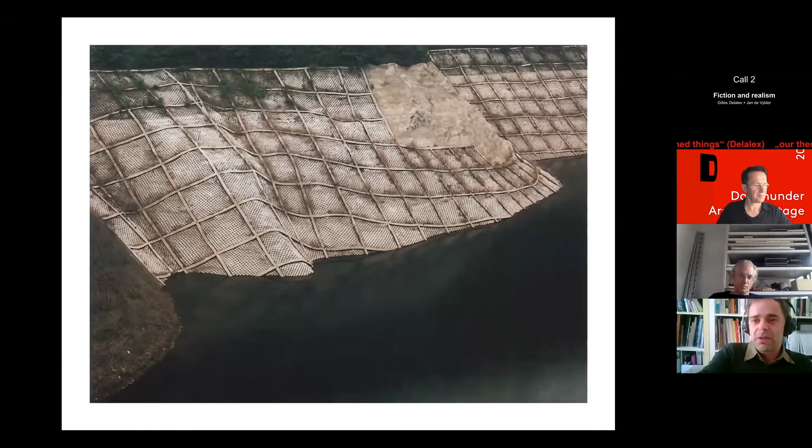We thought that status, it's not exactly architecture, but the status of this construction was quite interesting because they were like adolescents, they were like in the age of transition. You know, adolescents, they don't know whether they want to commit suicide or if they want to grow up, they're in between these two stages of destruction and construction.

So that's pretty much the thread that we try to define, but lately, not so long ago I would say, and that we maybe try to pursue today as much as we can, because it's not always easy to tell a client that their building is going to be like a ruin. It's not easy to sell an idea like that. So there's a series of projects where we've tried to follow a little bit that path.

There was the Saclay building, which is our most known published building, on the campus of Paris-Saclay. The particularity of the building is that you can play basketball on the roof, and half of the space inside is outside.

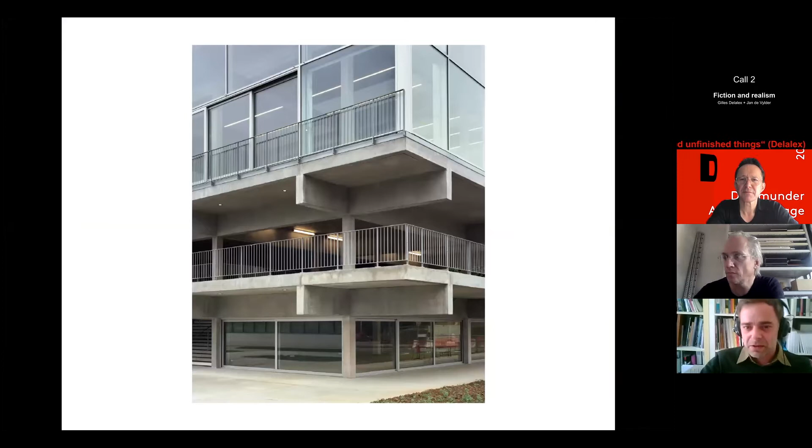Actually, there's only half of the total surface area that is actually built, and that came because the budget was very short. We proposed to not build a few parts, and said maybe on the first story, first level, we'll make it later. We thought it was interesting to have some holes like this in the building, like wasteland, things that are not built yet. And of course it was a powerful gesture in terms of architecture.

And we did a competition a little bit after that, quite in the same vein, because it's a kind of platform architecture where you fit different activities like a shelf, where you can climb from story to story with an open staircase. But this one was for housing and workshops. The idea with that is pretty much the idea of the immeuble villa, and everybody would build its own house inside.

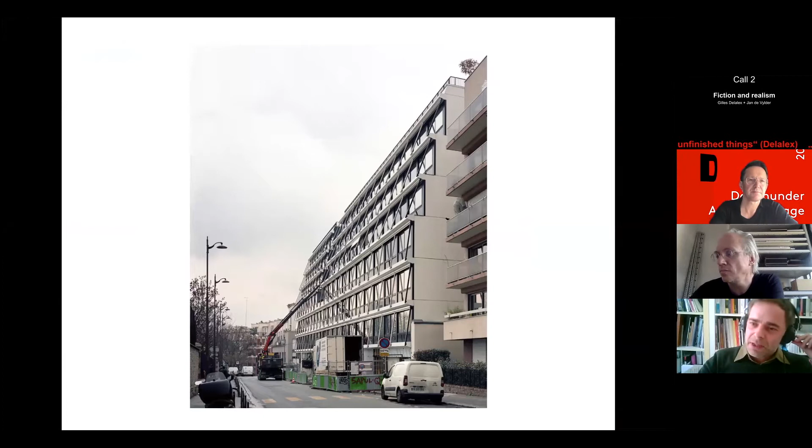That's a little further from the idea. That's a housing building we did in Paris, with Stendhal, in the northeast of Paris, and that was actually our first public commission. It's almost 10 years old. The idea was to work on that layer of balconies facing the street, working on a sort of thick facade that would be appropriable, making the face of the building change over time.

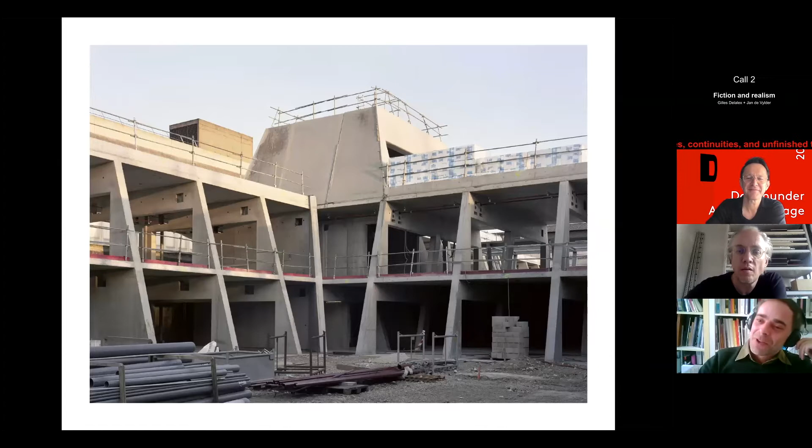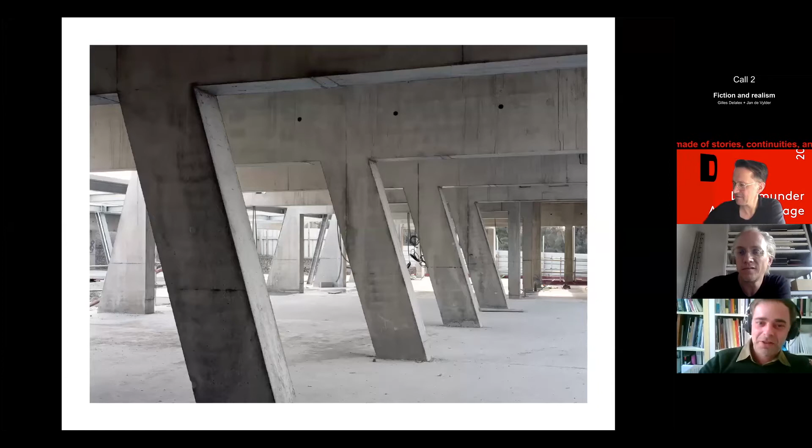And the last building I put is a school we did in the north of Paris, in Clichy. I have to admit we liked the building under construction a lot more than when it was finished. We thought the pictures taken during construction were much stronger, and if we could have kept it like this, it would have been nice. So I'm showing some pictures of when it was being built. The structure, the concrete, was pretty well done according to French standards.

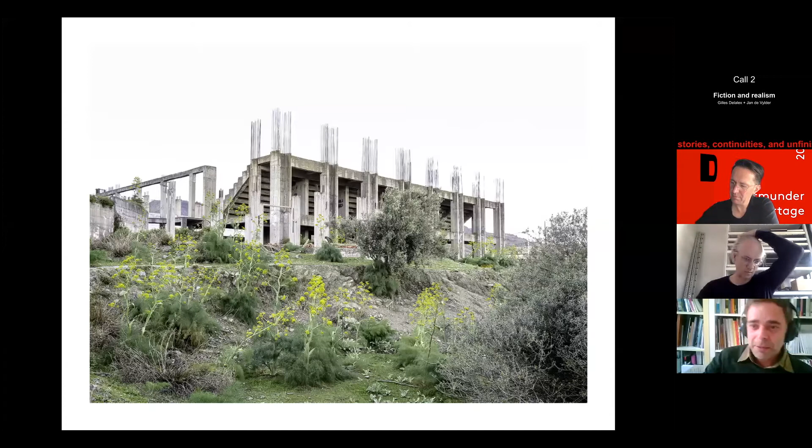And the last pictures I'm putting, which relate to that, are pictures of structures taken by Amélie Labourdette in Sicily and south of Italy. They're beautiful pictures, and I think they illustrate what we mean by this idea we call joyful ruins - ruins that are not in a state of destruction, but frozen, because construction of these buildings was interrupted. It was stopped, and you can feel that a little. They're not falling down, not falling apart. They are growing, but their growth, their construction, is sort of frozen.

So that's pretty much the end of my talk. Really, thanks a lot. Great pictures, and I hope we can keep it in mind for a moment.

I would like to ask Jan to show his short introduction. We are a little bit longer, so take your time, Jan. I think we have enough time to discuss, and it's good to follow your thoughts. Don't feel too much under pressure - even Gilles already spent half the time. No, it's all okay, I just want to prepare.

Okay, here they are. I set them aside because as Gilles was showing these beautiful images, I'd like to show him also some beautiful images he might be very interested in. Where do I start? Do I start with reflecting first on what might be the theme of the afternoon, or do I just constantly start to deny it?

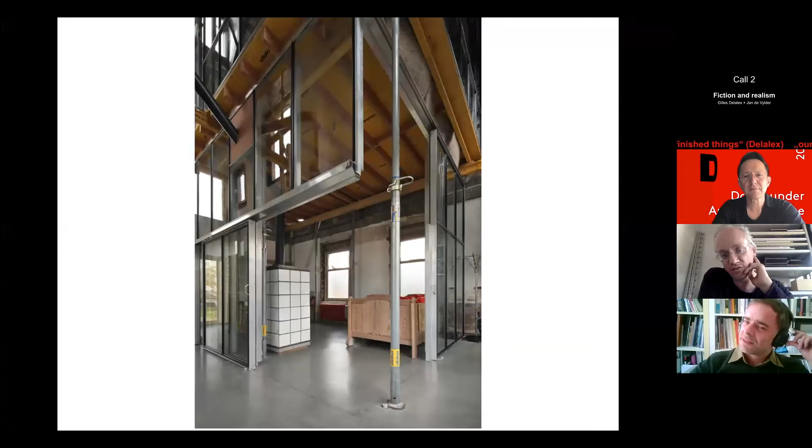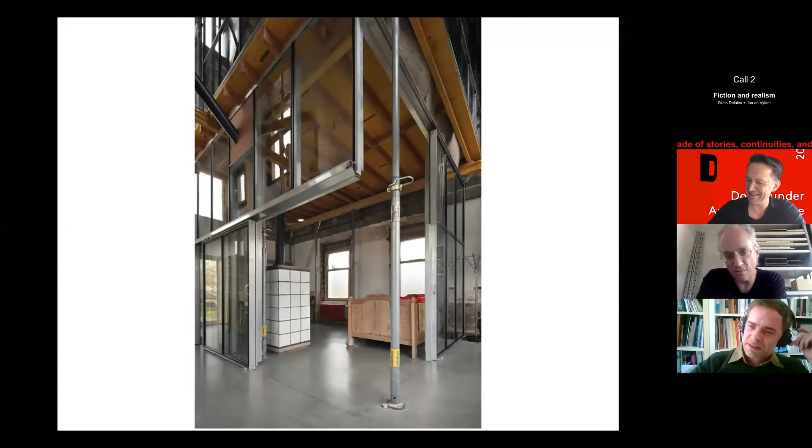And the first project I show you when it comes to an idea of modernity, I don't know, is a glazed house. I tell it like this because of the theme of the afternoon - a glazed house, which is reflecting modernity, isn't it? Into an old house. A little bit the opposite to what modernity might do, getting to the outside, you could say, but here it's on the inside of the house.

And of course, never ever has there been any reflection on modernity when we built this house, never at all. We were building a house to live in, but on the other hand, a lot of things of course resemble or remind or reflect ideas of modernity, like the glazed facade, the productivity of the materials and the systems, of course, refer.

So what you see here is a simple refurbishment of a house. It's more than 10 years ago at this moment, I think, and it's a house that has been made to be self-built. This was one of the premises of the job, because for not 100,000 euros, organizing a house into a building that by renovation only already would cost like 10 times the price.

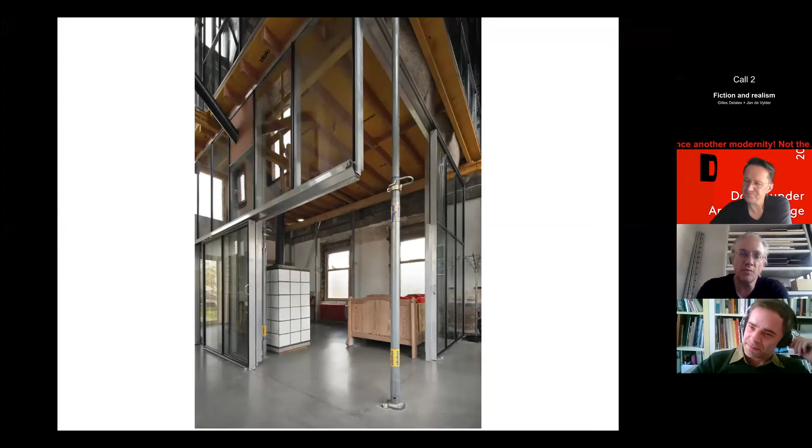Not ten times, I exaggerate, but at least, if you would do it in an ordinary or normal way, you would spend 500 and something like this. So they built themselves a house, an economy based on material economy rather than production economy. That means they could produce it themselves, which of course is valued at zero. Well, valued very much because it's your own human interest, your own human energy, but you don't have to pay for it.

So what you see here is a small house within a smaller house, within a slightly taller house, I would say, in which everything has been constructed so that productive ideas on one hand, but also an artisanal, personal way of realizing, has been important. I think that last point is not at all the idea of modernity, not at all the idea of how to produce space. But this is what it is at this point.

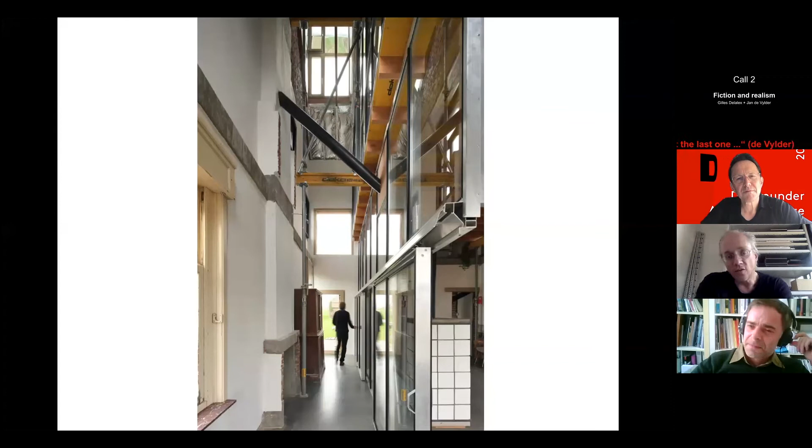And of course it's not only about reflecting on how to make it, how we can possibly do, what can we do, but it's also related to ideas on simple things. We believe architecture is still important to light, shadow, life, air, view, perspective. Look at this.

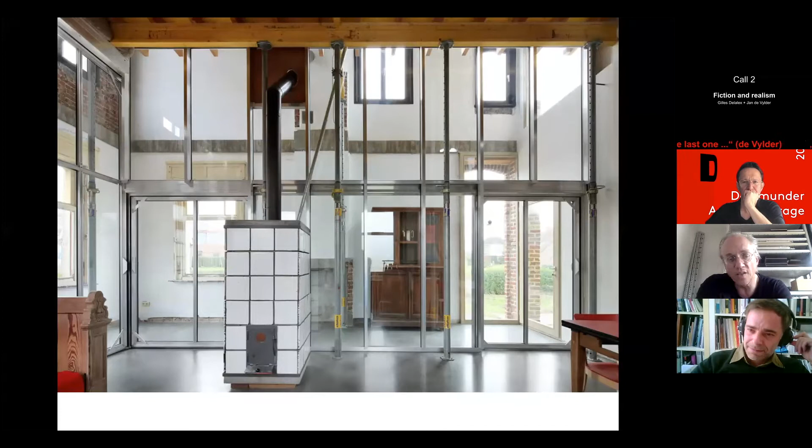This is the way the glazed house is embedded in the old house. And I could say a lot of things, like nowadays sustainable thoughts - the space between the original wall and the glazed wall is of course a good insulation shield, with double glazing and so on, and you don't need this or that. All what we like to hear today, but I don't think that sustainability in that sense is the best thing that has been brought to architecture today.

If we could talk about sustainability as being the recap of what we have, no more, no less, then we are arriving at a more interesting conversation about sustainabilities. But let's skip sustainability for today.

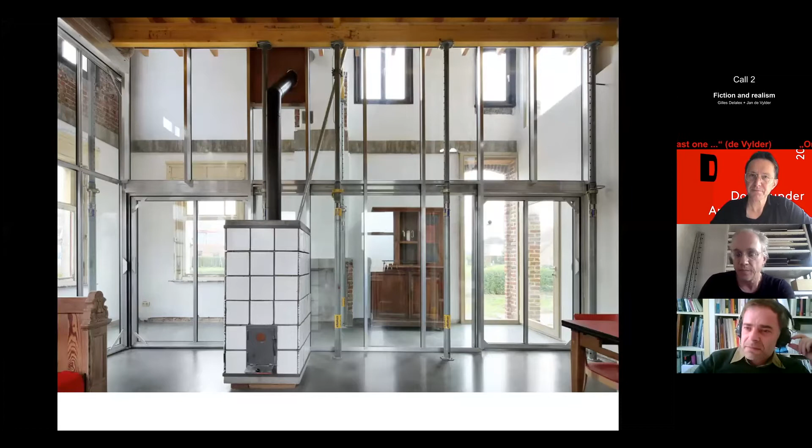Anyway, some images. That's it.

Second one I'd like to bring to the table - the project has to do with the feeling, to me as an architect, of the way we look at things, the way we move through time with projects. Good projects always become a little stone in your shoe while walking, you know. You want to keep walking, but there's a little stone in your shoe that hurts a little, but you're too lazy or you want to deny it, and sometimes that little stone gets in between your teeth.

And then it comes back, and then finally you have to open it and things come out differently. And I think the first house I showed you was also one that brought us back to the fact that, to me, essentially today the question is not what should we do, but what can we do. And in a certain way they are related. Should we do is maybe the result of a long consideration, while what can we do is maybe the result of an immediate, intuitive action.

So this is the project for the Caritas Psychiatric Clinic, which is the result of a competition, in which the brief said clearly: listen, we don't know what to do with the building, can you do something with it? And if you can't do something with it, then advise us to demolish it. So the alternative for what we have today over there would have been a grass field, a pelouse, nothing else. We believed this had to be avoided.

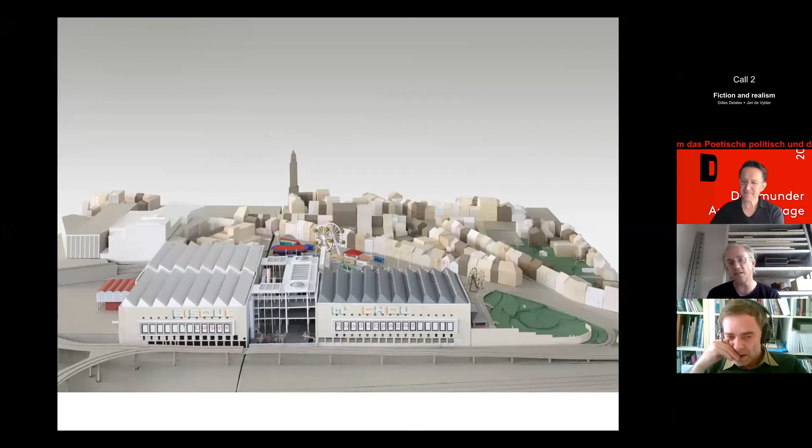This mega block was just smashed into that city. And that's the proposal we made.

In the middle, we will copy some existing staircase and bring it even to the lower level floor, which is 9 meters high. We get some escalators and everything, and the patio in the middle with the old chimneys will be open. We saved two thirds of the money.

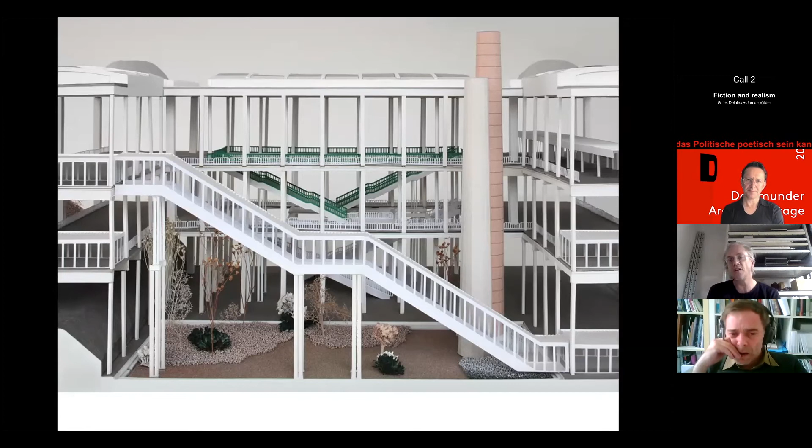And two thirds of the money we could invest in the other parts of the building to restore it technically. We even don't have any architectural ambition there, except that we want to renovate electricity, take away the asbestos roof, and so on. But for one third, we realize a total open building at this point.

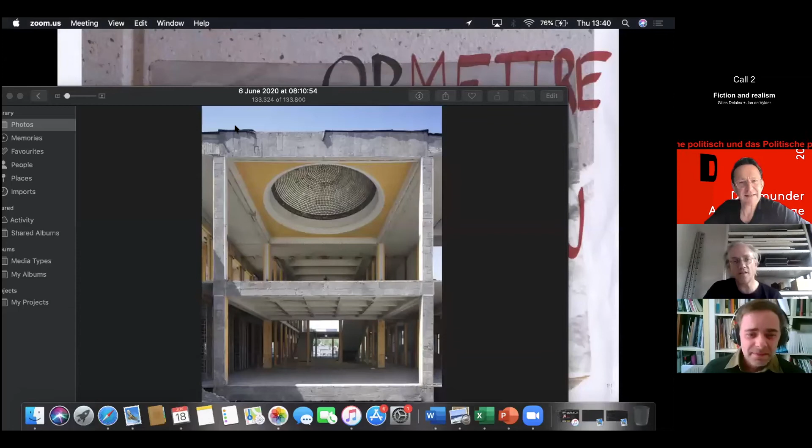It was—if I can switch, how can I get stop share? I now quickly go to those images for you, Gilles. We are now at the building site. Do you see the screen now? No, share screen. Okay, here you are. Now you should, isn't it? Perfect. So now you are in my private image bank, so maybe some family photos might pass also, but it's not a talk about that.

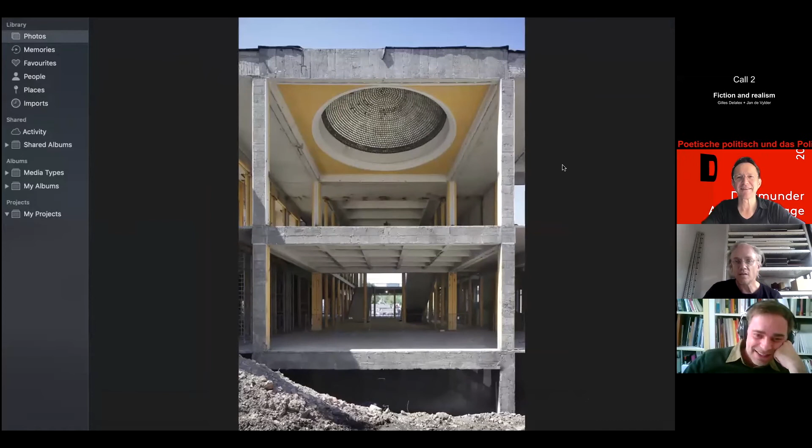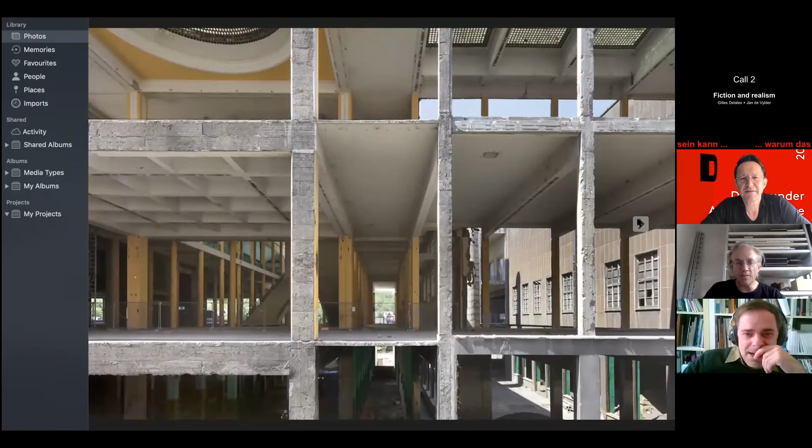But here you can see a little bit—how can I move this? Wait, now I move you out of my arrows. Here you can see a little bit where we are today. We have started stripping the building. Those are images from Philippe Dujardin, taken about 2 weeks ago.

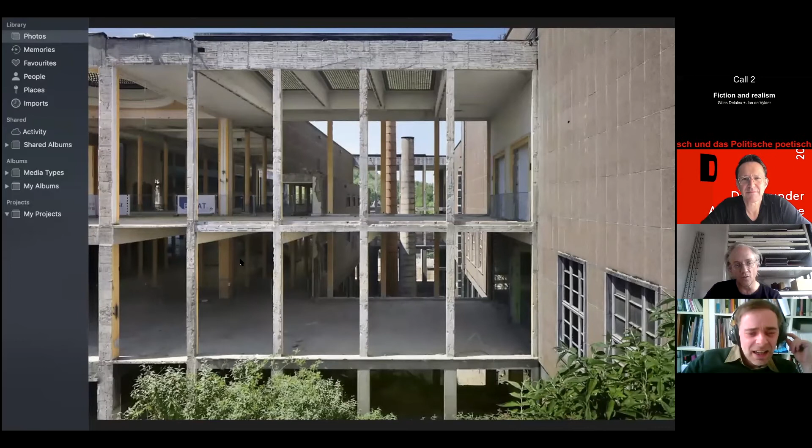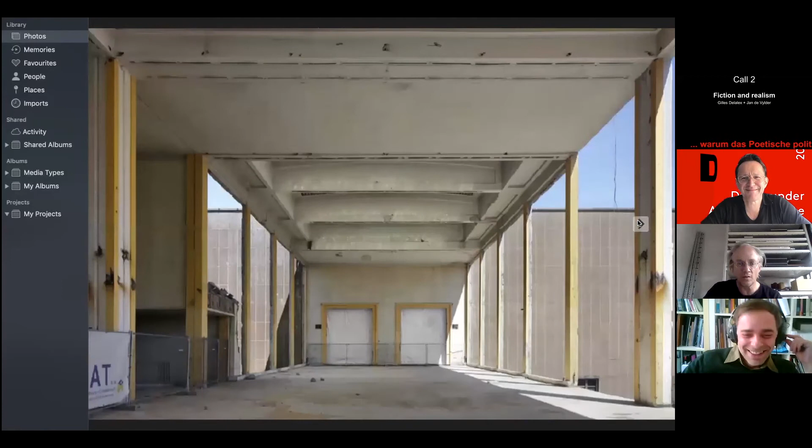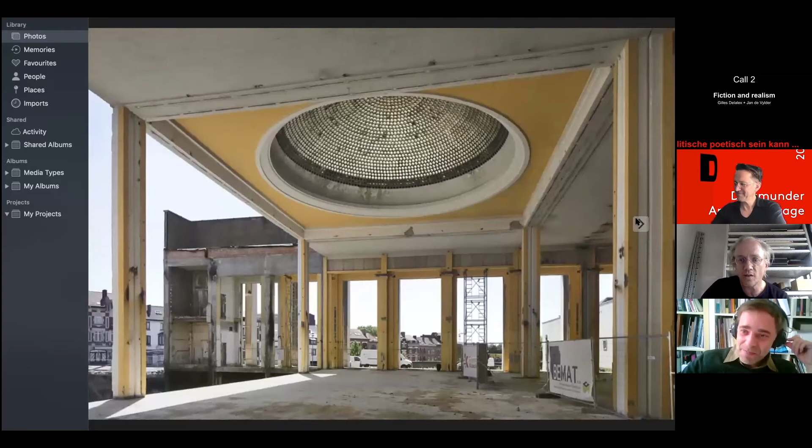Here you start seeing, we still have to open the floor to add 2 more staircases going down. I'm going a little bit quickly because I made a mistake and downloaded the images twice, that's why you see them double. I wasn't prepared for that, but as you were showing the structures, maybe I'll quickly go through. Let's go slow, I'll check some images with you.

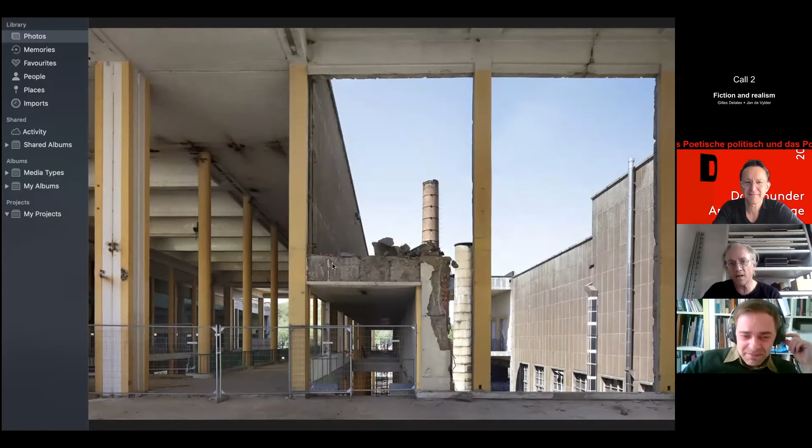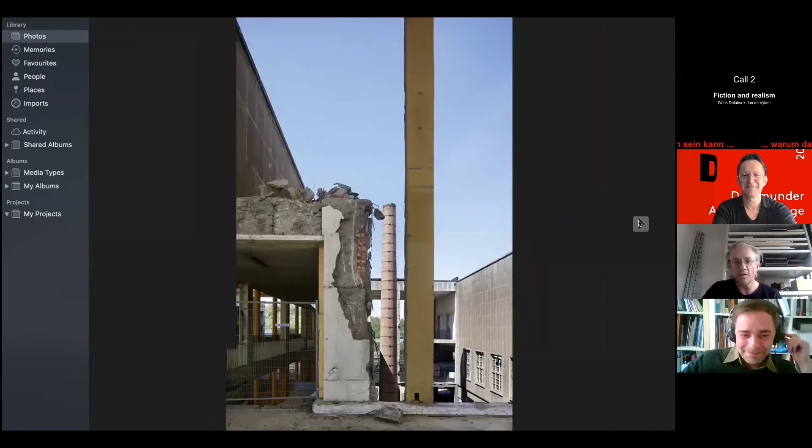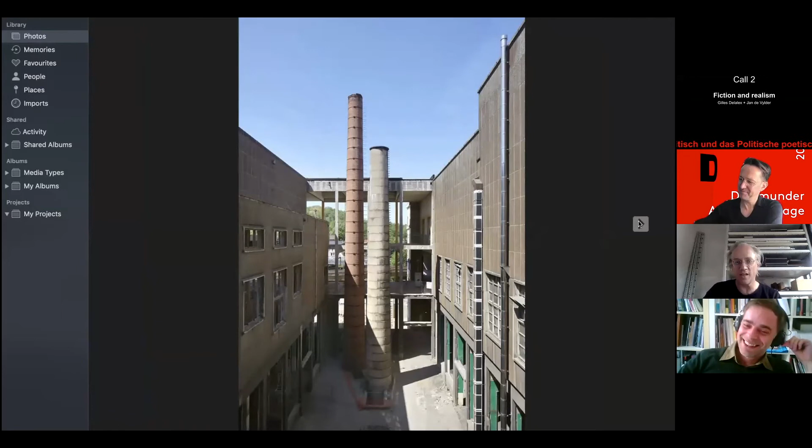You see this starting here already—I don't know if you see the arrow of my mouse. Yes, we see it—you see the city, or the lower city part, on the other side already. Of course, typical Philippe Dujardin images, you see. The problem for Philippe here is that this is not a collage, this is what it is.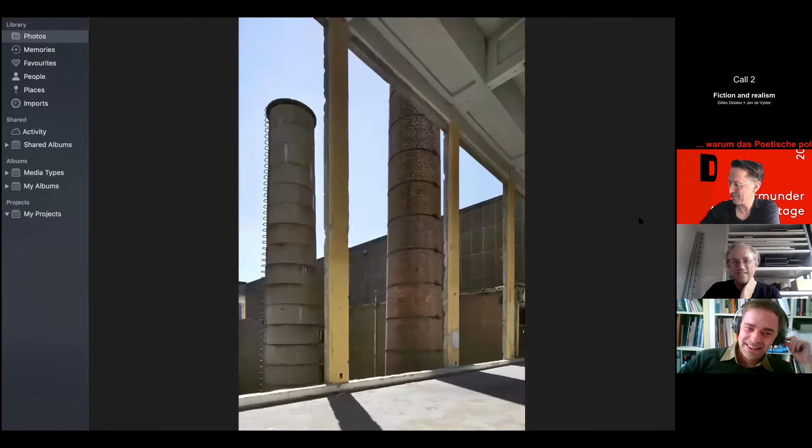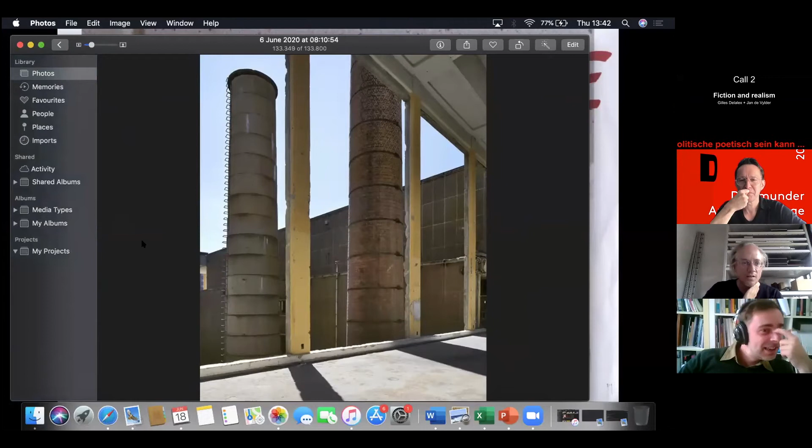He gets quite nervous when he is there, because he sees what he dreams about—talking about fiction and reality. And you see those images, but let me try to quickly go to the other image, how can I get out again? Wait, I want to see the photos again. Anyway, I'll quickly go this way, you see—this is one of the images, also nice to look at, I think, to understand a little bit what we are up to.

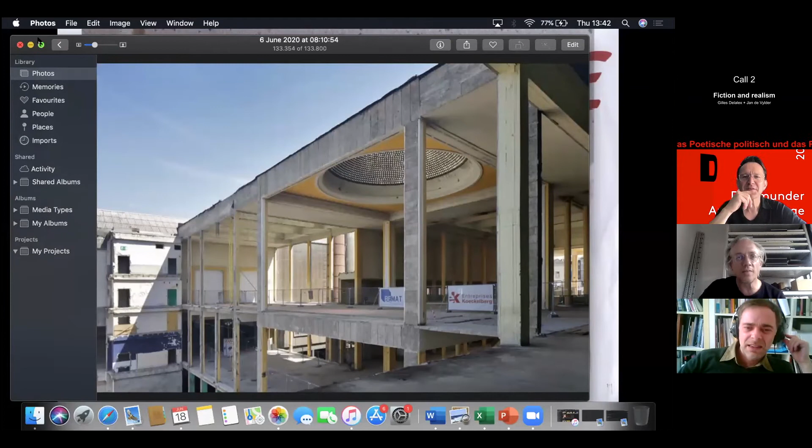Well, talking about it, the green was already there, eh? Okay.

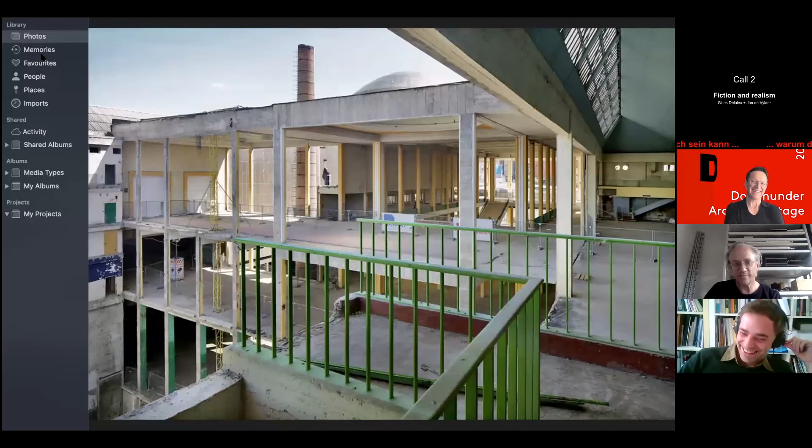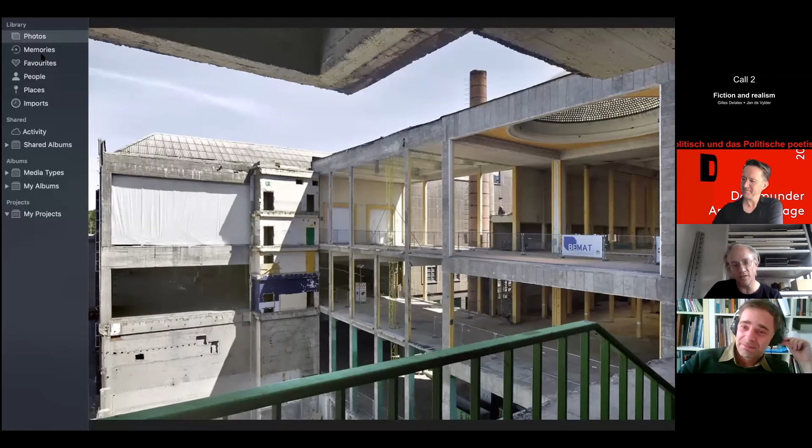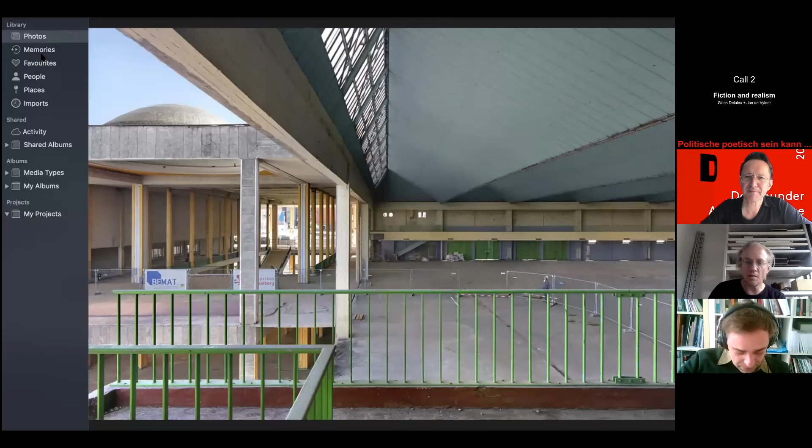So here you start to see the whole, let's say, cadavre. Is this modernity has something to do with the availability of a cadaver delivered in the past and eventually available for the future? I don't know. It might be. Here we are at the edge of one of the main spaces. You see these unbelievable tall spans. And then in the depth on the left, you see the above city, let's call it.

Anyway, I'm going to leave this screen and go back to the prepared little introduction, of which typically for architects, we take four times the time foreseen.

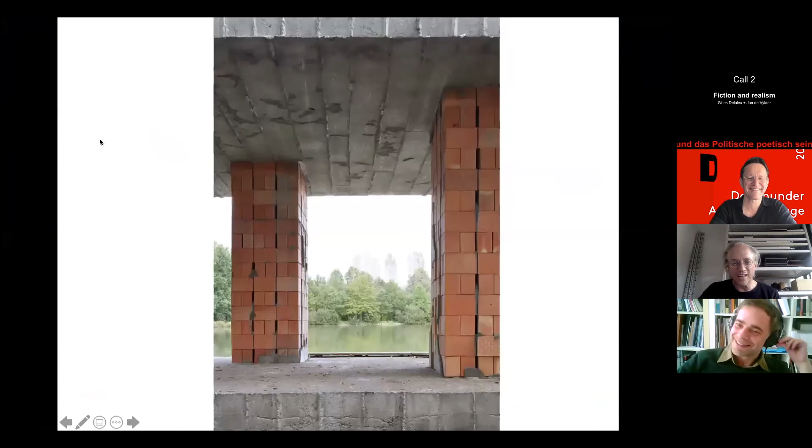It saved money. And by saving money, space has been found. Today, it's been a couple of years, but I remember Ante Timmermans told me that in the beginning the school did not know what to do with the space. They had been fighting for every square meter on subsidies to get a taller school, and then they were given this space which was not defined. The only imagination they had in the beginning was something like, can we put our bikes there, or can we put the dustbins there, what can we do with it? While the artist said, no, keep it locked for one year. You can't enter it. And then you will maybe discover another way of use.

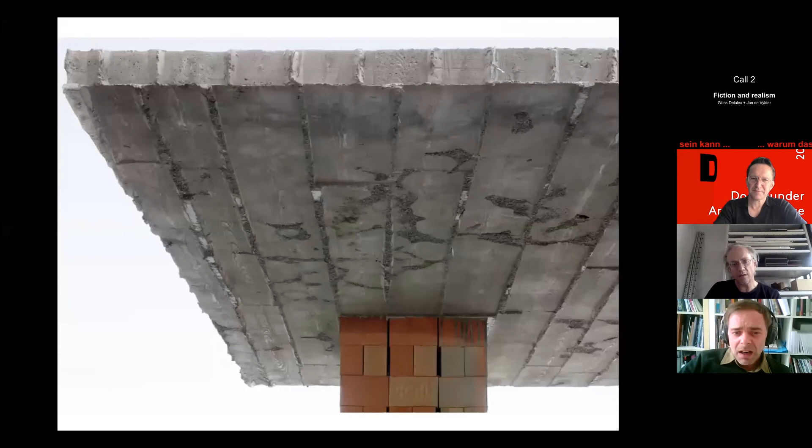And this pavilion is based, it's concrete—that's maybe a pity, one could say with nowadays understanding—but it's form-cast with planks which were on site from a previous little hut that was there. On the other hand, it's stacked stone, but not made as masonry; we just poured concrete in between. And the roof's armature is too little, so it sags a bit and the water just falls down. It has, in all its ways, kind of an opposite perception. It's not exactly what we often are looking for in detailing in architecture.

Lieven de Cauter, philosopher, called it a non-homage to Mies van der Rohe. I never saw it in it, but he said the classic order of things brought back in a kind of... I thought it was too much, what he was saying. But then afterwards, he also told me he didn't like the project at all. Huh? And that was a nice point.